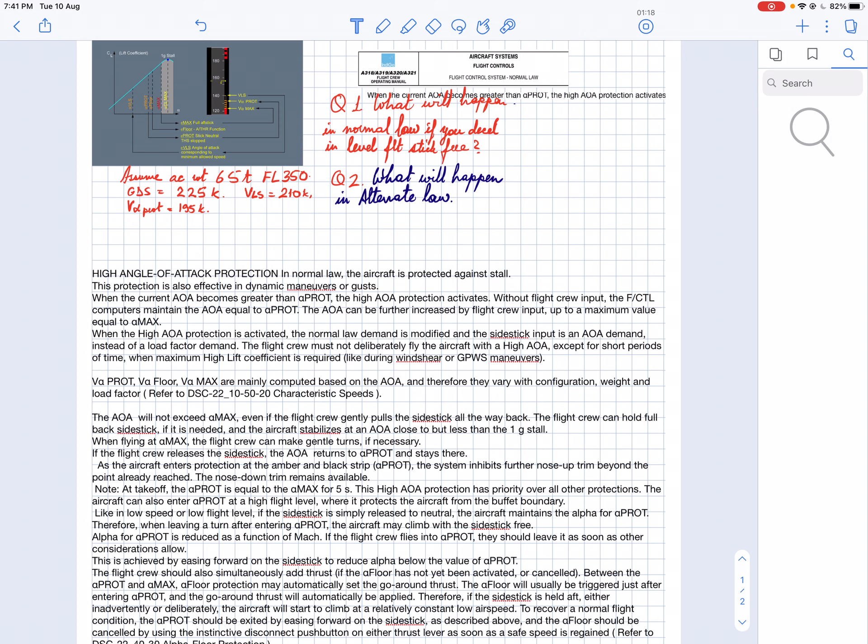I'm trying out a lesson on high angle of attack handling using Notability. On the screen you have some questions.

On the left you have the diagram of lift coefficient versus the representations on the speed scale. This is made for the landing configuration, whereas what we need to do is look at a reasonable configuration at which we will do high angle of attack handling, that is, flight level 350, aircraft weight of 65 tons. This will give you green dot speed of 225, VLS approximately 210, and V alpha prot 195. So let's look at these figures in this light.

Green dot speed would come, if you say VLS is 210 knots, this would be 210. This would be 230 and 250. So green dot speed would be at 225. That is, we'll take the color green and put a dot at 225 over here. This would be green dot speed.

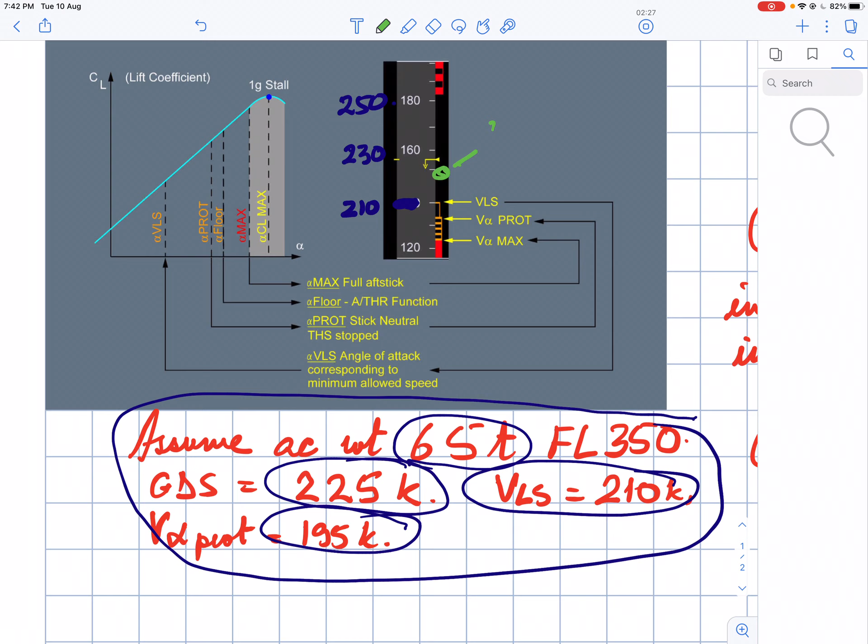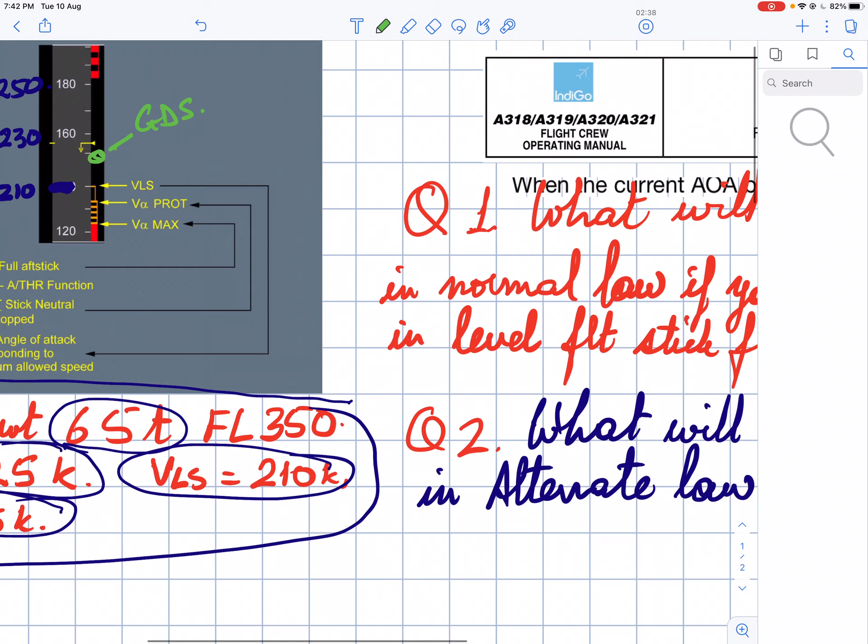Okay, let's see what would happen. You put the aircraft in level flight. That means if I draw a representative PFD here, this is a representative PFD. Yellow is the color of the bars, so we'll put the yellow bars here with a dot in the middle, and green is the color of the bird, so we'll put the bird here and imagine that the bird is on the horizon.

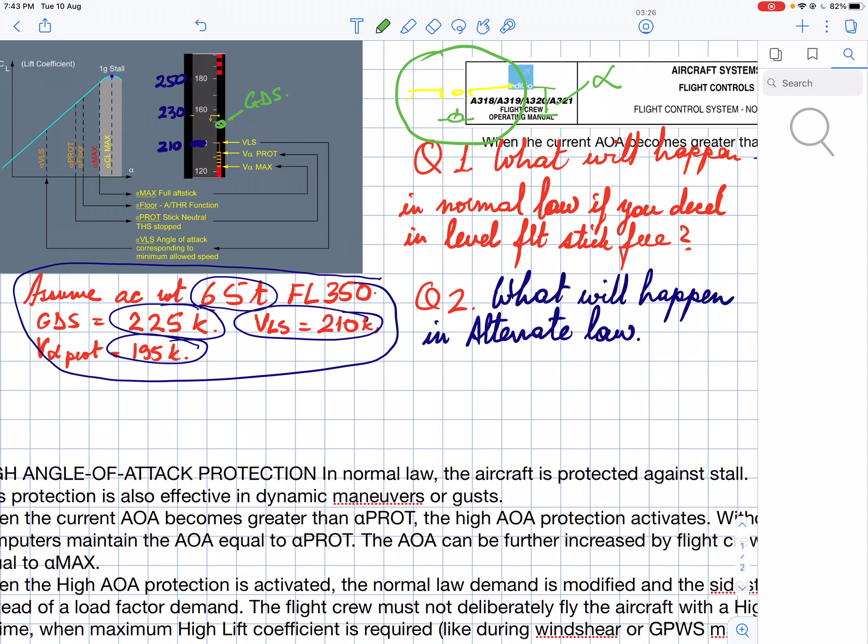So what would happen is the bird would remain on the horizon because normal law would protect the flight path to maintain a 1G flight path. As the aircraft slows, the angle of attack, represented by this difference, would continue to increase. That means the aircraft would auto trim the flight path by bringing the nose up in normal law. If you look at this scale, the speed would keep dropping from 225, 220, down to 210.

At 225 knots, at green dot speed, the angle of attack will always be 5 degrees. Correspondingly, the angles of attack for VLS and V alpha prot would also be fixed, although I don't know exactly what the figures are. But let's assume that they are 7 degrees and 9 degrees. Assume.

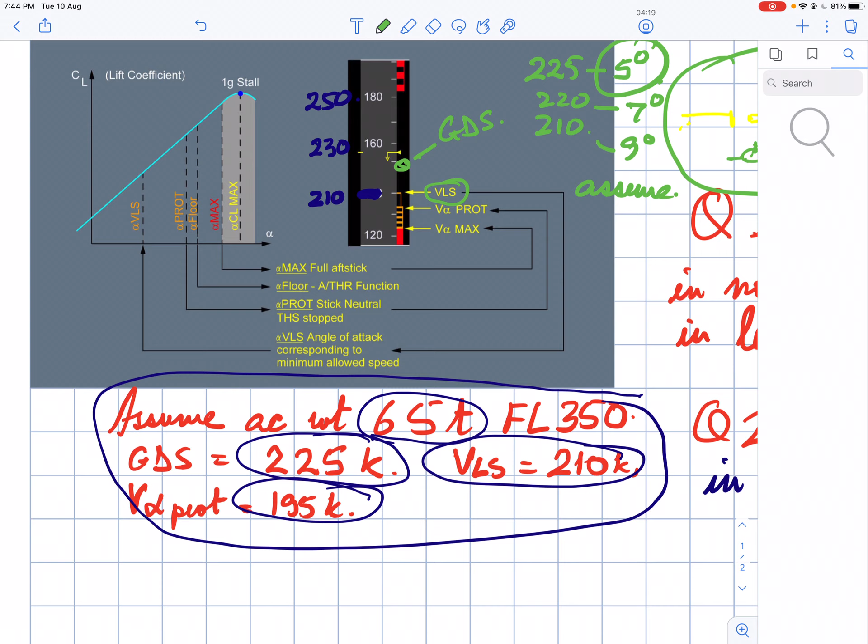What would happen at VLS? All that would happen at VLS is, if the autopilot was not engaged, you cannot now engage the autopilot below VLS. Nothing else will happen. The aircraft will continue to decelerate and continue to auto trim, because the normal law is asking the aircraft to stabilize a 1G flight path. And auto trim will continue.

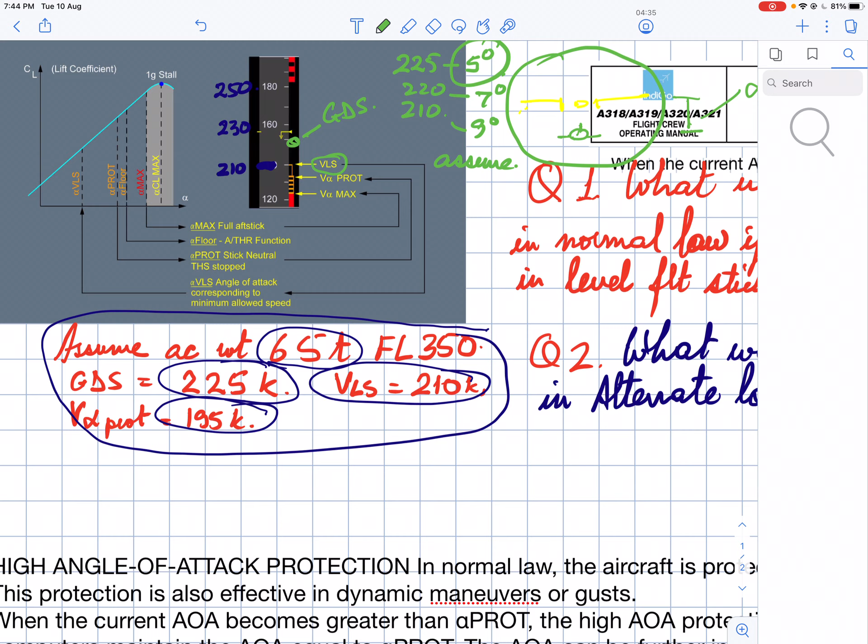When will the auto trim stop? When the flight path is no longer being protected or maintained, because the alpha has reached an angle of attack called alpha prot. What is alpha prot and what is V alpha prot?

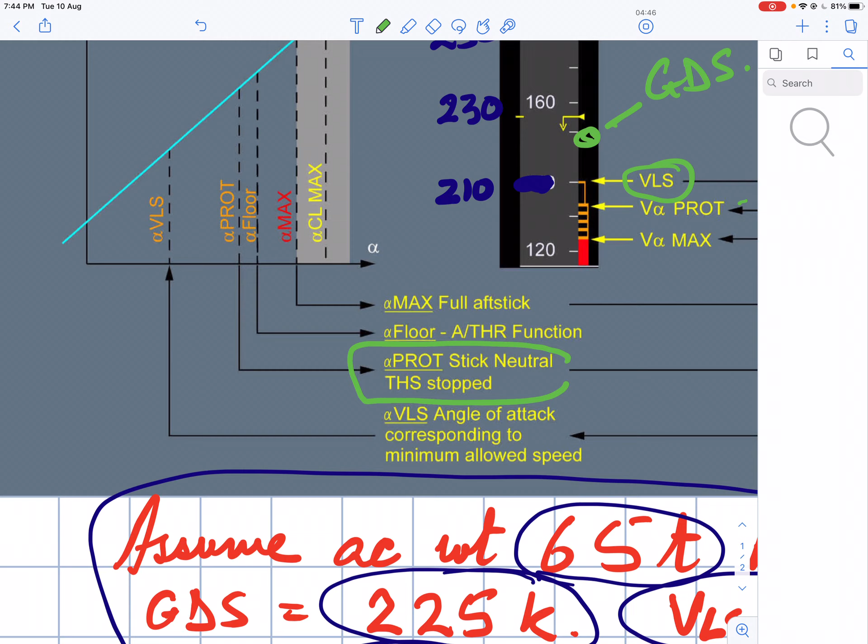Let's look at this. This is stick neutral. THS will stop trimming. This is when it corresponds to an angle of attack, this angle of attack here. So this angle of attack is alpha prot, and that corresponds to V alpha prot here on this scale.

Next, as the aircraft keeps decelerating further, you will come to V alpha prot, but the aircraft will not allow itself to auto trim because the THS has stopped trimming over here. So what will happen is the aircraft will maintain an angle of attack. Which angle of attack do you think it will maintain? It will maintain alpha prot angle of attack, because after this angle of attack, protection is active. It's not flight path protection anymore.

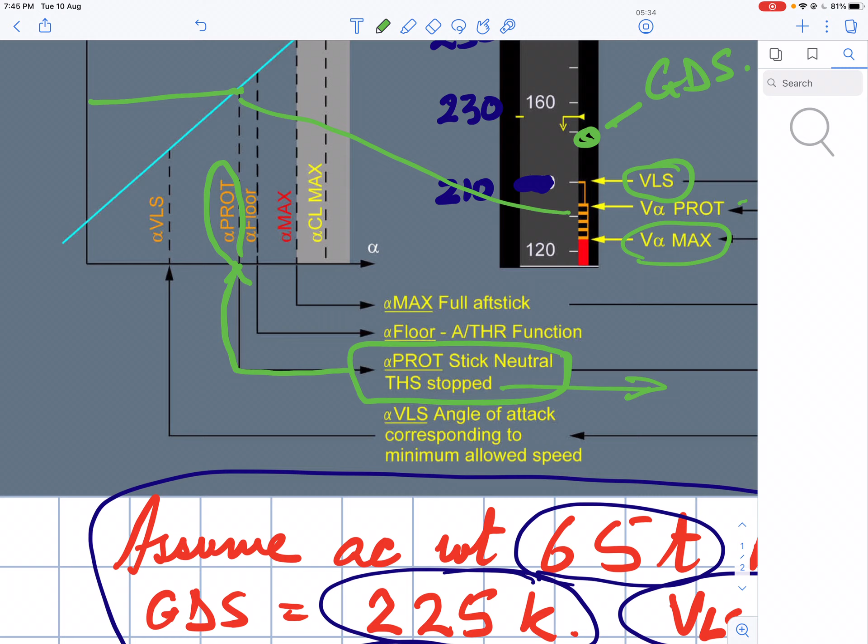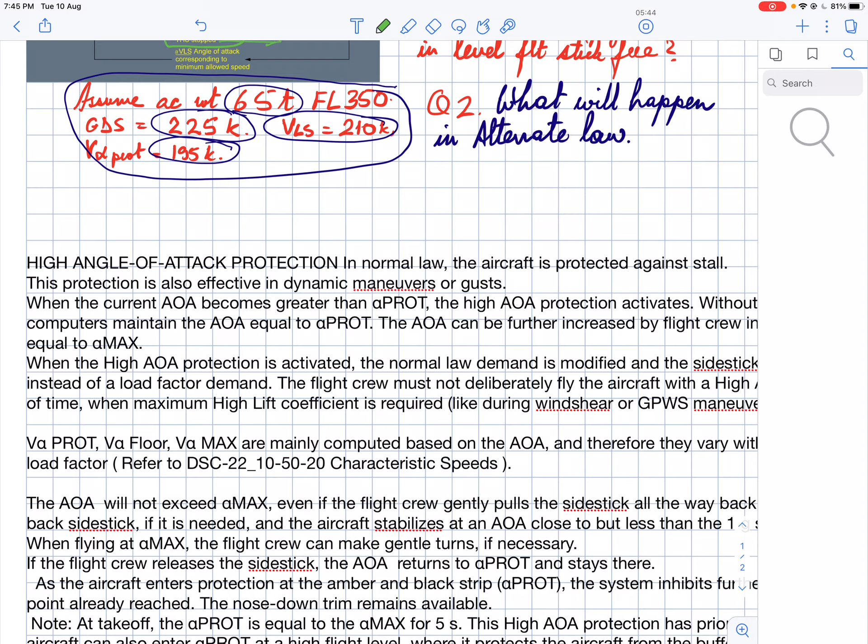What does alpha protection mean? That beyond this angle of attack, the aircraft will not fly with a stick free. And what does it say here? The angle of attack can be further increased by flight crew input up to a maximum equal to alpha max. So as we keep decelerating in this diagram, we will reach alpha max at full aft stick, and that will correspond to this angle of attack.

Now we will see that this is not yet the stall, okay, but this is the margin that Airbus feels is required to be maintained between the max angle of attack that you can pull and the angle of attack that gives you maximum lift. That's why this is called a protected aircraft, and the advantage this confers is that when you want to maneuver in an emergency situation such as terrain avoidance, you can pull full back stick in the knowledge that the aircraft flight control system will not allow you to reach the alpha where you will actually stall.

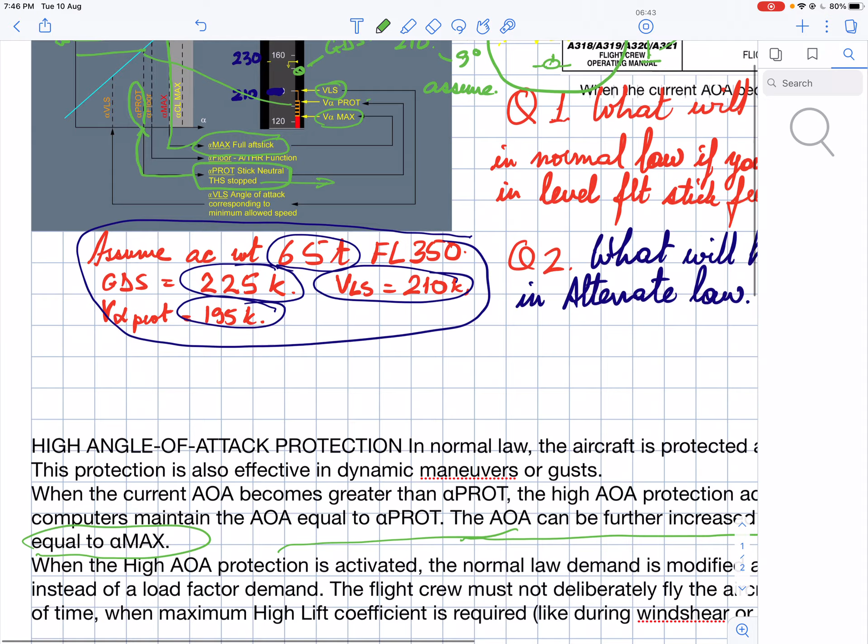So what happens between alpha prot and alpha max? This is exactly where low speed handling and recovery from stall, etc, comes in. Okay, let's change the color so that we can deal with things in different colors.

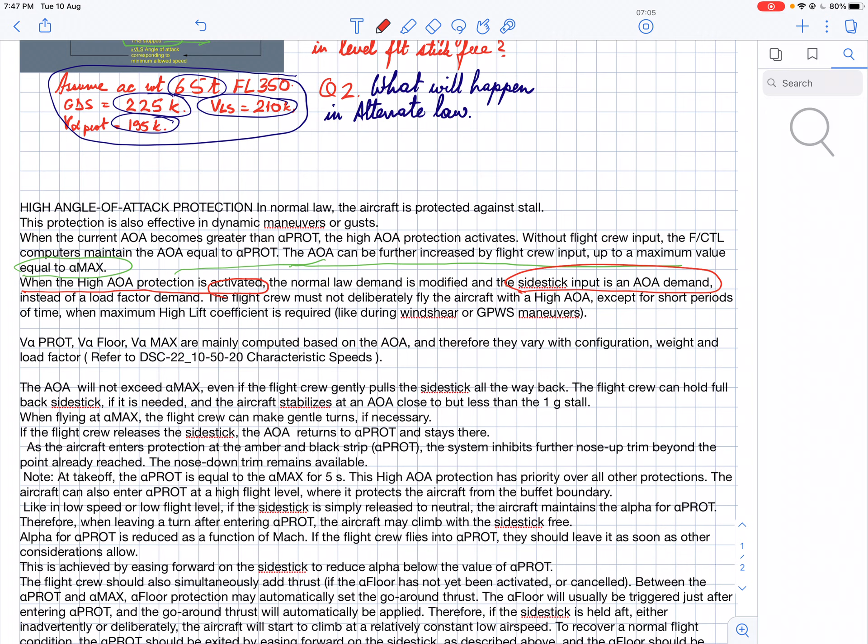When high angle of attack protection is activated, the normal law demand is modified and the side stick input becomes an alpha demand. So let's take the first question: what will happen in normal law if you decelerate in level flight with stick free?

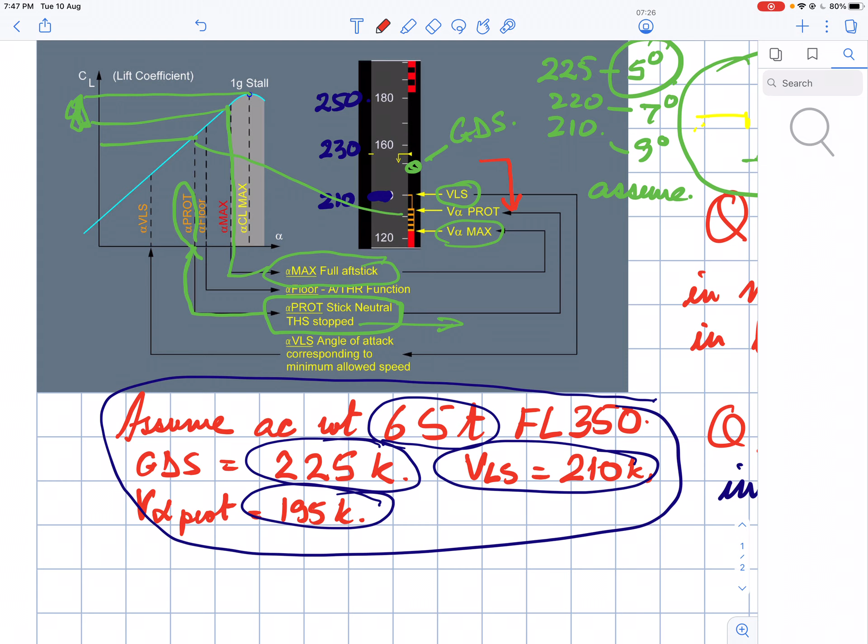So looking at this diagram, what will happen is the speed will reduce through GDS all the way to what speed? Alpha prot. If your stick is free, the aircraft will not fly an angle of attack higher than alpha prot. So the aircraft will start descending, maintaining alpha prot. What else will happen?

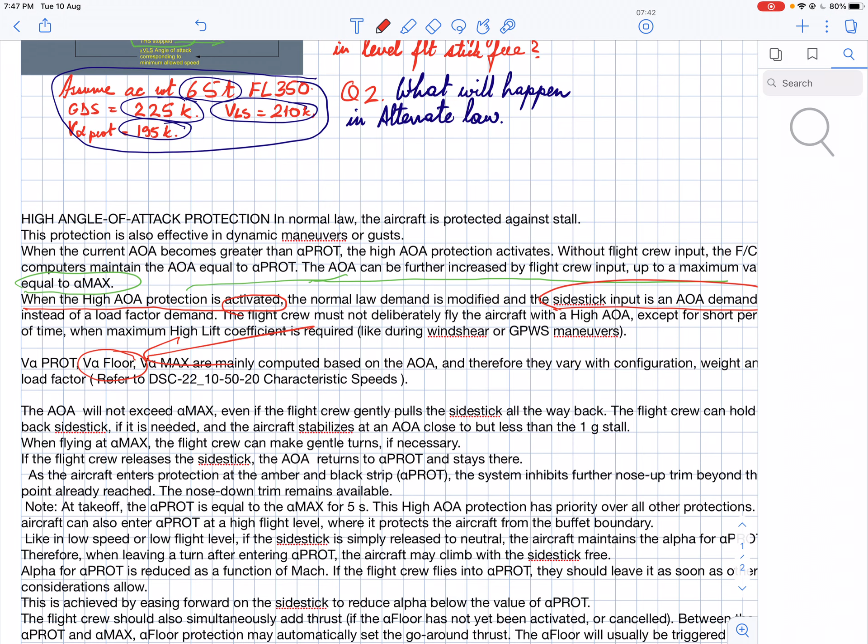The other protections that are inherent along with this is that there is an alpha floor protection. What this would do is, the alpha floor is computed based on AOA and altitude and some other parameters. So when the AOA exceeds alpha prot, then you will get full thrust. The aircraft will maintain alpha prot and the aircraft will fly away at roughly alpha prot and climb away.

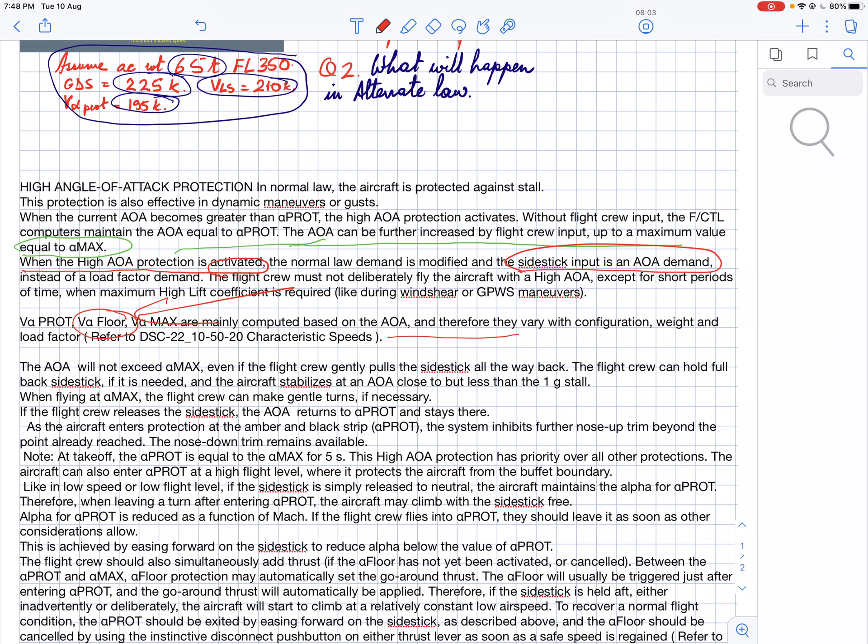Now, why does the aircraft not level off? This is a question that you can think of and answer in your own mind. But what I can tell you is the aircraft will not level off because when you hit alpha prot, the THS has been stopped. So the aircraft is not trimming anymore. So the aircraft is maintaining alpha prot and has abandoned the attempt to maintain a flight path. This is built into the system because the aircraft designer wants to provide a safe flight path rather than a desired flight path. Because you have not made your desire plain by holding the stick and putting the aircraft into the flight path that you want.

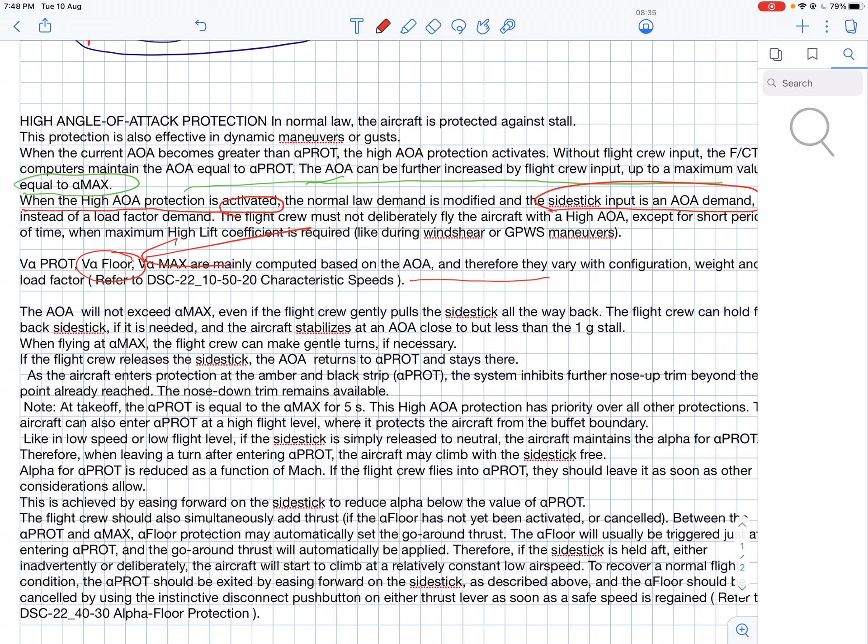So let's look at the first golden rule of the Airbus, that is fly. So in this situation, fly dictates that you will choose the flight path that you want, put the bird there, and the aircraft will now maintain this flight path provided this does not require it to operate beyond alpha prot. So what we saw is the aircraft enters the protection. In the amber and black strip, the system inhibits further nose-up trim. Nose-down trim is available. So if you push the stick forward and the alpha reduces below alpha prot, then the aircraft will accept the nose-down trim, fly out of alpha prot, and then be in normal law, which means that it will maintain the bird wherever you left it.

Another key point is, let's take a case where at high altitude, you do a steep turn with 60 degrees of bank. This will require you to fly into alpha prot. Will there be any difference in handling characteristics? None. Because to maintain level flight with bank beyond 33, you will have to apply stick pressure. And if you fly into alpha prot, there is no difference from what you were doing earlier. When you fly into alpha prot, there will be no significant difference in aircraft handling whatsoever, except that the speed may drop off because you come to maximum drag. Beyond alpha prot, the auto thrust will put in TOGA, but the thrust is already at max climb thrust, which is also equal to TOGA, so there will be no difference in that either.

The difference will be when you roll out of the turn. When you roll out of the turn, you expect that if you rolled out with a bird on the horizon, the bird will remain there and the aircraft will thereafter fly. That is only true if you are outside alpha prot. What would happen if you left the turn after entering alpha prot? That means when you roll out of the turn, your angle of attack is more than alpha prot. The law will be that the aircraft will maintain alpha prot and the aircraft may climb with the side stick free. So this could be a surprising characteristic of the aircraft to many who have not gone into this or experienced this. So what do you have to do?

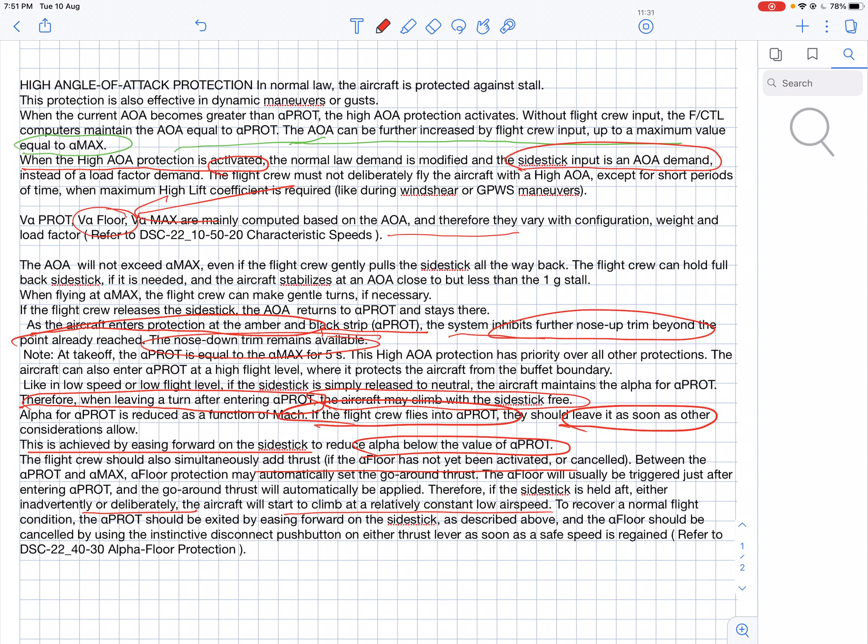If the flight crew flies into alpha prot, they should leave it as soon as other considerations allow. That is, you're clear of the ground, you're clear of wind shear, you're clear of whatever aircraft there is. So how should they leave alpha prot? By pushing the nose down to get out of the angle of attack that is requiring alpha prot, stabilize the flight path, and then leave the controls. So this is what it says. This is achieved by easing forward on the side stick. This will reduce the angle of attack to which point? Below the value of alpha prot. The flight crew should also simultaneously add thrust if alpha floor has not been activated. If the side stick is held aft, either inadvertently or deliberately, the aircraft will start to climb at a relatively constant low airspeed. This is the function that will take place in normal law.

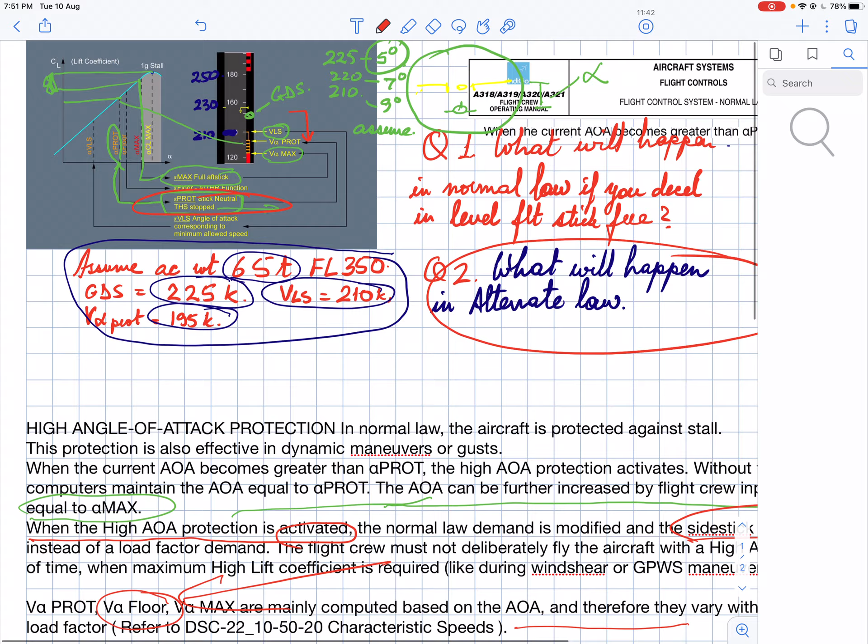Now let's look at the second question, what if you did the same thing in alternate law? Let's see what are the differences on this diagram with the law in alternate law. First of all, the V alpha prot will be replaced by V stall warning. The representation of this is black and red bars. This change of color is to signify that there is no protection available here, but there is a warning.

What about flight path control? In alternate law, pitch law is normal. That is, the aircraft will maintain the flight path and keep raising its pitch attitude to below VLS and up to alpha prot, which now corresponds to stall warning. If you don't do anything, the aircraft will start sinking to maintain alpha prot, which is not shown to you. But during this process, if you pull the stick back slightly, your angle of attack would enter into the V stall warning angle of attack, and you would get stall.

If you didn't do anything, you could still get stall warning because there could be a delay between the aircraft putting its nose down and the angle of attack reducing due to a gust or other disturbance, and you would still get stall. Will the aircraft recover from the stall?

Yes and no. Because the moment it recovers, it will try to maintain alpha prot and go into a secondary stall. So let's see how this affects our stalling sequence when carrying out a stall at high altitude.

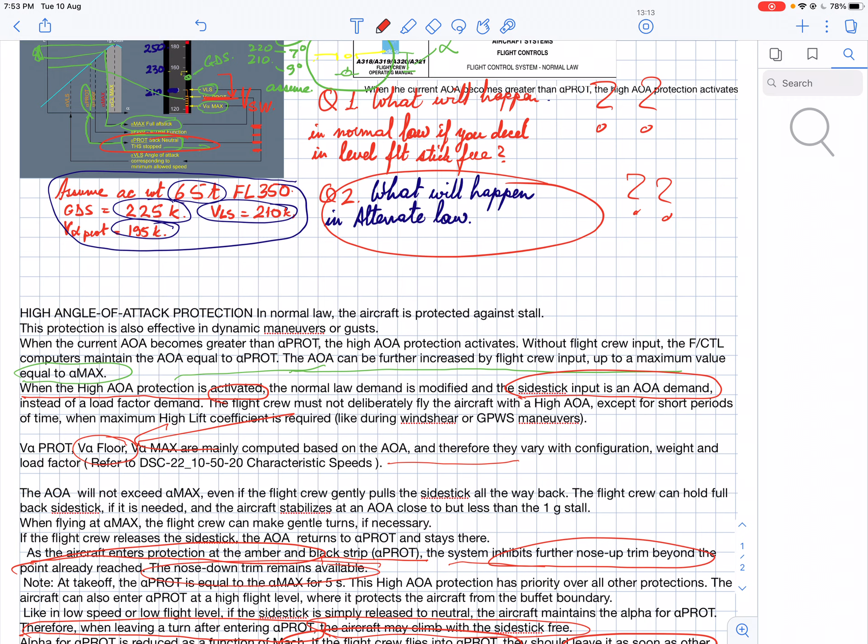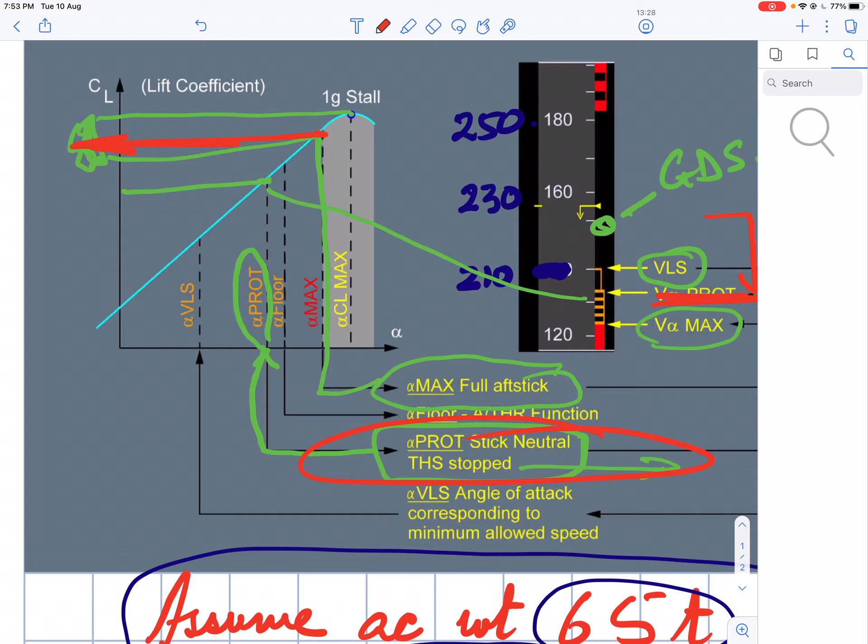We saw from the protections given in the aircraft that you cannot exceed the angle of attack, that is V alpha max, under any circumstances in normal law. In alternate law, you could exceed this angle of attack, and the stall recovery is meant to ensure you do not come anywhere near it.

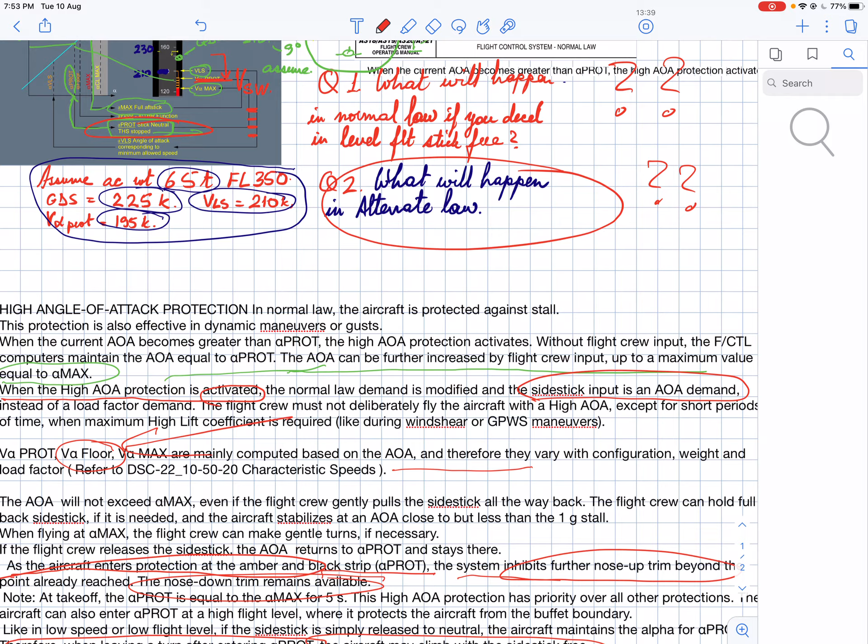So what will happen is, at the first indication of stall warning, you are required to take memory actions: push the stick forward, nose down, pitch control, apply. Now when we are briefing a technique, we want to know what briefing is adequate and why it is given like this.

What do we want to achieve by pushing the stick forward? We want to reduce the angle of attack. Can we see the angle of attack? It is indicated on the PFD by the difference between the attitude, which is the black and yellow box, and the bird. So the difference between these two, in number of degrees, is the angle of attack.

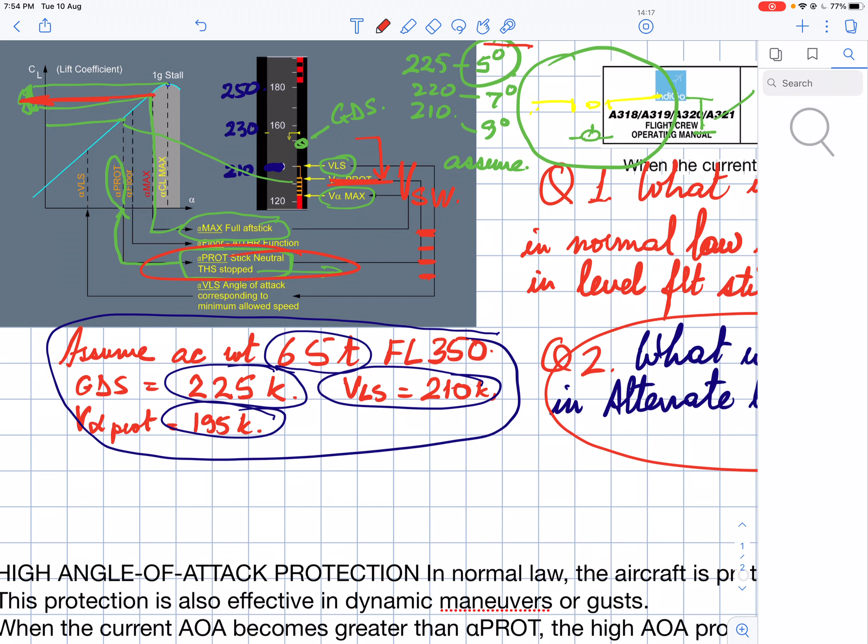So what indication do we have of the angle of attack? We had seen earlier that at 225 knots, the angle of attack is 5 degrees. So if you push the stick forward until the pitch attitude is resting just above the bird, then you have an angle of attack of 3 degrees if it is touching the bird, and a little above the bird, you will have an angle of attack of 5 degrees.

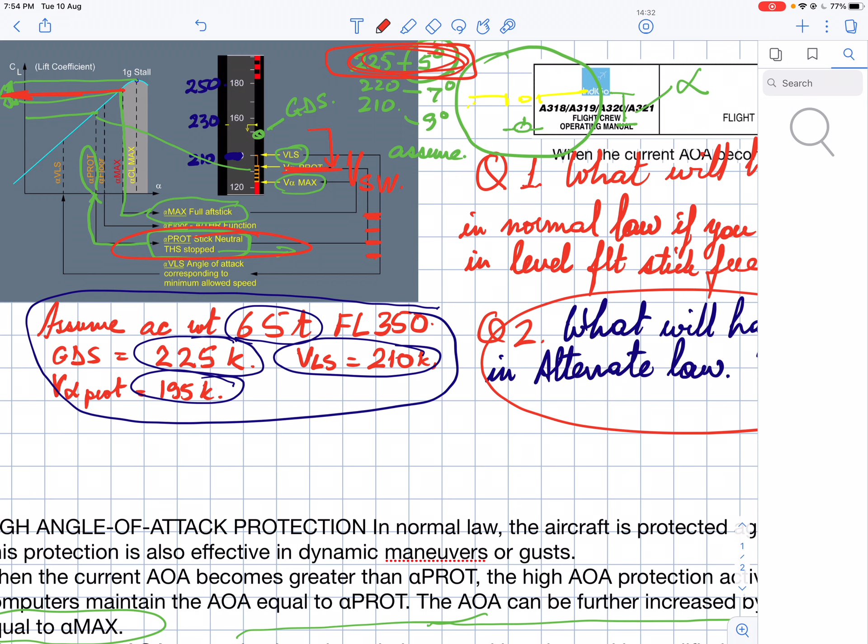This is just an indication. So the briefing is, push the box into the bird and hold it on top of the bird. Now the speed will build up. When the speed builds up, the aircraft would tend to pitch nose up if you left the controls. Why would it tend to pitch nose up?

Because the side stick is now being controlled to give you alpha prot, which is not what you want. If you didn't do anything, when the aircraft pitches up, the V stall warning, which had gone far below your speed scale when you pushed the nose down, will again jump up and could hit your current speed, and in that case you would get stall once again.

In fact, you would get stall even before it reaches your current speed, because there is an advanced function built into it, which depends on the rate at which it is increasing. So what is the briefing? Hold the nose down to maintain a 3 to 5 degrees angle of attack until the speed crosses VLS.

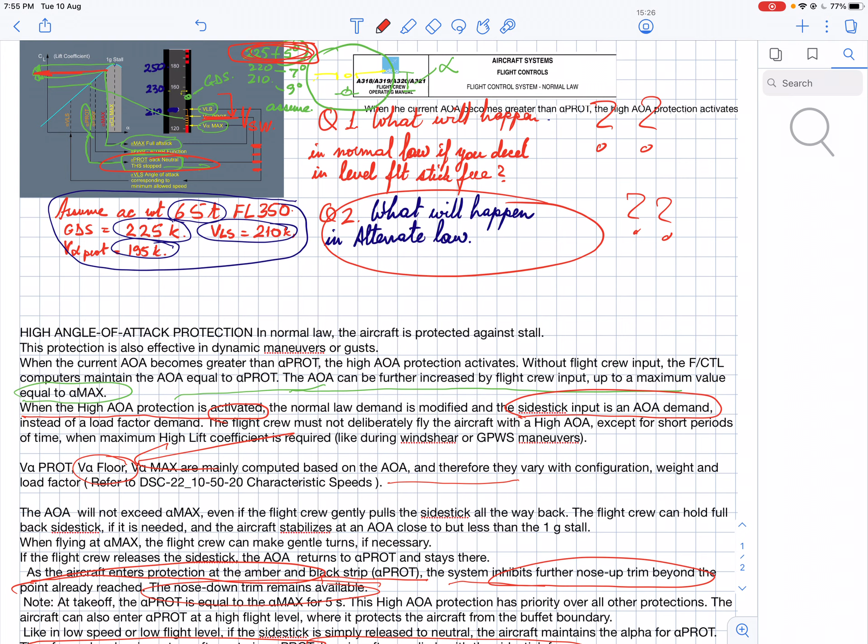In our example, VLS is 210 knots, which is quite significantly above the V alpha prot speed of 195. Once it crosses VLS, hold the nose down and apply full thrust. After this, start pulling out of the dive.

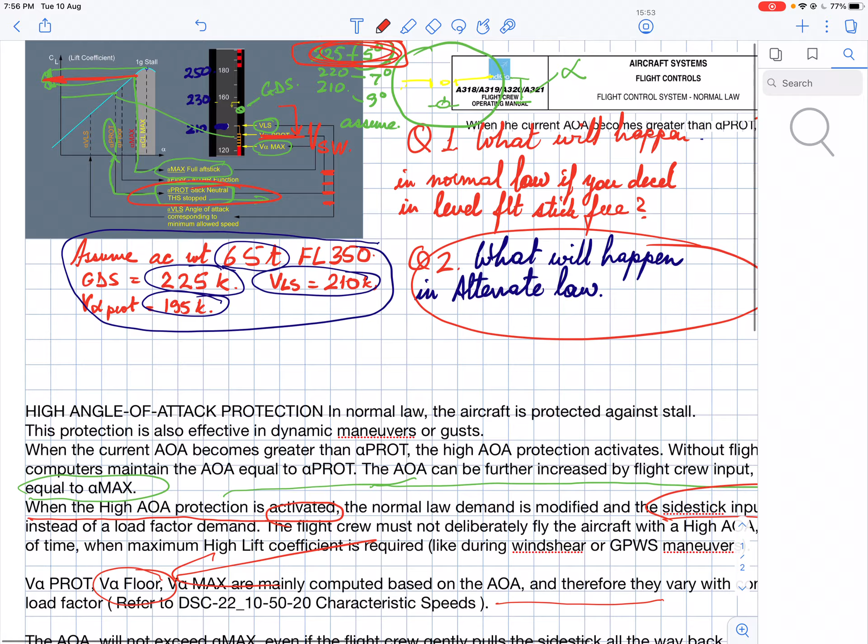When you pull out of the dive, the moment you apply pressure to the stick, you are going to increase your angle of attack. The moment your angle of attack increases, you are going to be coming closer to the stall warning angle of attack, which is this one. This is now V stall warning, that is stall warning angle of attack.

So the moment your angle of attack increases to this value, you will get stall warning. So what you want to do is limit your angle of attack to this value. How you can do this is, when you start pulling out, look for the V stall warning to jump up at you. As it comes up, hold the stick forward.

The moment you hold the stick forward, the V stall warning will go down again. After that, again pull out by another 2.5 degrees and hold it there. The V stall warning will come up again and stop and go down again. So if you keep doing this in stages, you would in fact be riding the tape of V stall warning, keeping comfortably above it by about 20 knots or so.

So if you do it smoothly, you can do it continuously. But if there's a difficulty doing it continuously, you can pull out in steps of 2.5 degrees. So the briefing is: plan to raise the attitude by 2.5 degrees and hold it there. You're looking at the bird and raising it by 2.5 degrees and holding it there.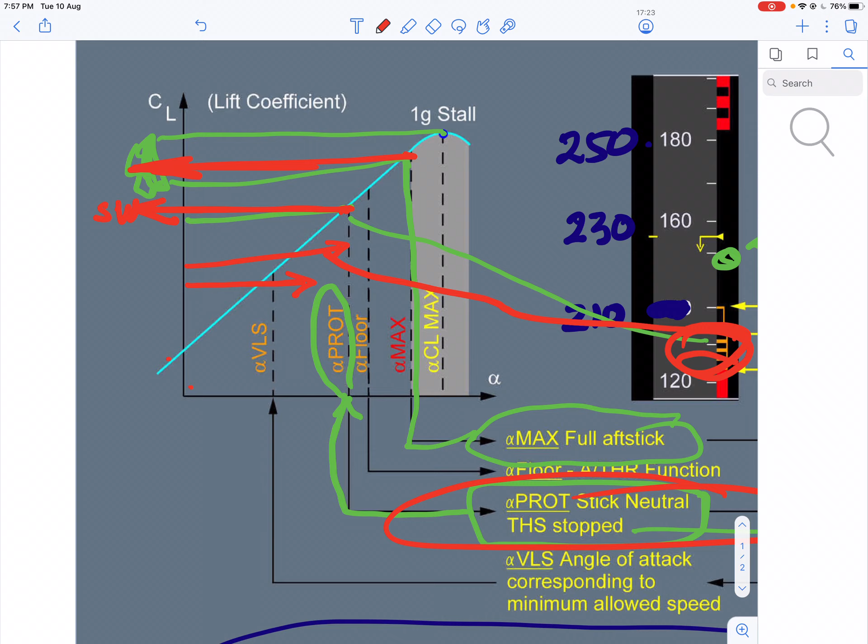The moment you raise the bird, the V stall warning will come up. The moment you hold the bird there, the V stall warning will go down. So 2.5 degrees is just sufficient for you to make a meaningful change in the dive angle, but not sufficient for the V stall warning to jump up and bite you, unless you do this really fast. So if you do this smoothly, you will in effect be doing a continuous pull out. This is the briefing for the stall warning and stall recovery.